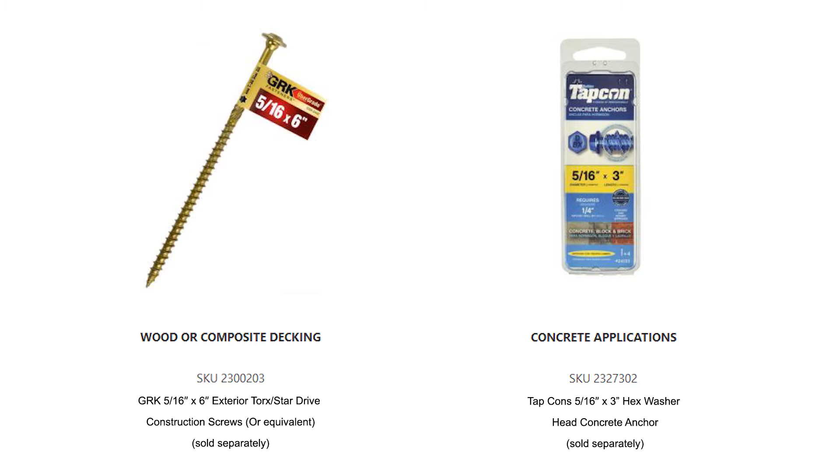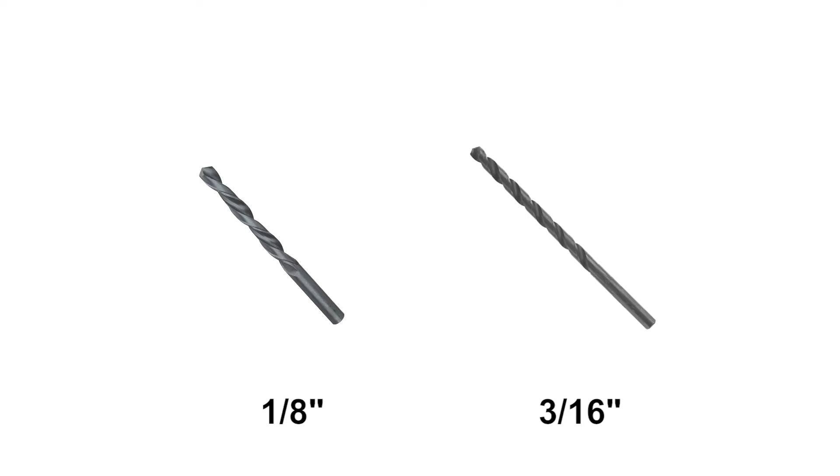Prior to starting the installation of any aluminum railing project, ensure you have the proper tools and safety protection. We recommend the following tools: safety glasses, tape measure, pencil, level, miter saw with non-ferrous blade, cordless drill, 4 clamps, carpenter square, appropriate fasteners for mounting posts to deck surface, lower rail clip jig, cutoff tool, 6-inch number 2 square drive bit, 1/8 inch and 3/16 inch drill bits, 3/16 inch hex wrench included with cable kits, cable gripping tool (optional), cable cutting tool (optional), cable release tool (optional), threading tool (optional), 90-degree threading tool (optional).

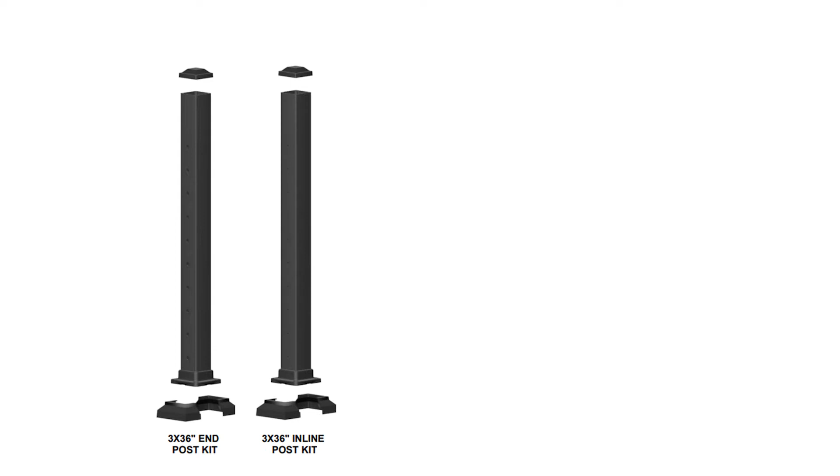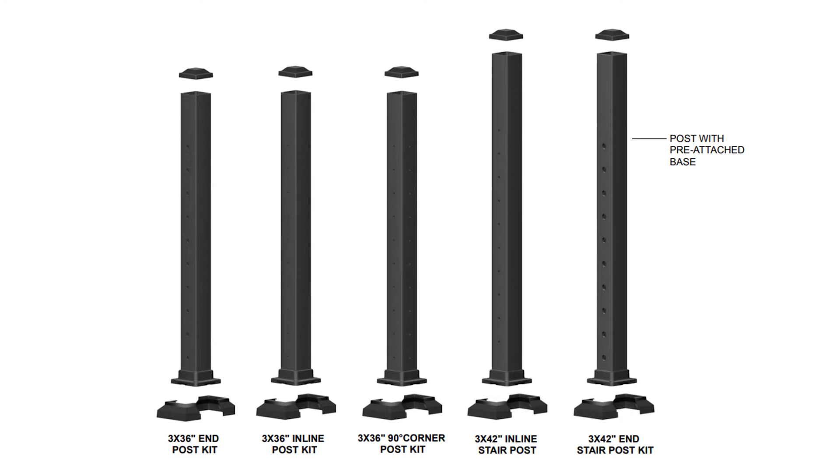Kits and parts for assembly: 3x36 inch end post, 3x36 inch inline post, 3x36 inch corner post, 3x42 inch inline stair post, 3x42 inch end stair post. Each post kit includes an aluminum post tube with attached base plate, post cap, and 2-piece base plate cover and an install guide.

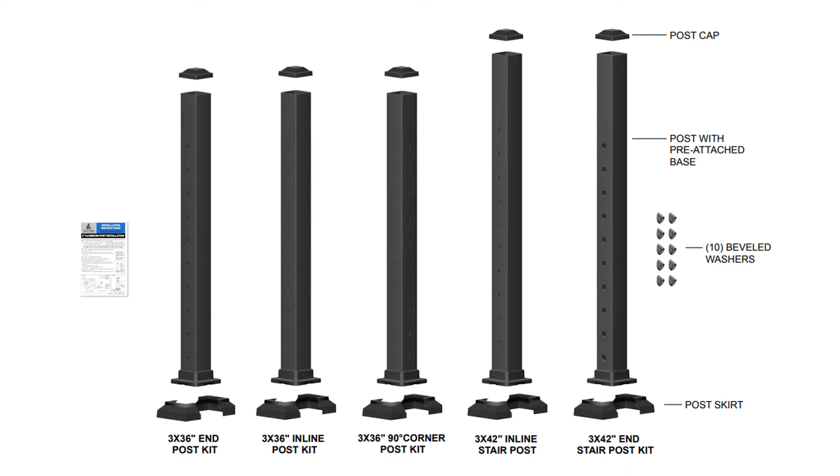3x42 inch end stair post kit includes 10 beveled washers. Post to deck mount screws; anchors are sold separately.

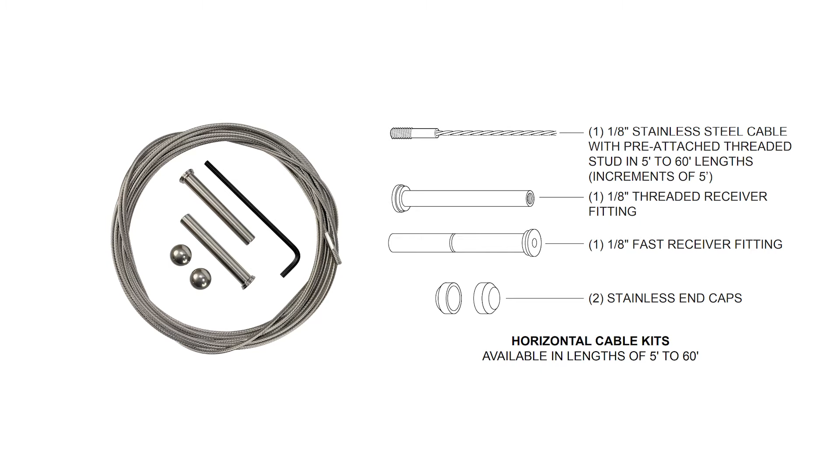Horizontal cable kits available in lengths of 5 feet to 60 feet. 1 1/8 inch stainless steel cable with pre-attached threaded stud in 5 feet to 60 feet lengths, in increments of 5 feet. 1 1/8 inch threaded receiver fitting. 1 1/8 inch fast receiver fitting. 2 stainless end caps. Horizontal cable deck stair full frame kit.

1 top rail snap, 1 top H-channel, 2 straight plastic plugs, 2 angled plastic plugs, 1 intermediate cable support, 1 bottom H-channel, 1 bottom rail snap, 4 deck attach clips, 4 stair attach clips, 20 number 8x3/4 inch self-tapping screws, 1 support leg with screw.

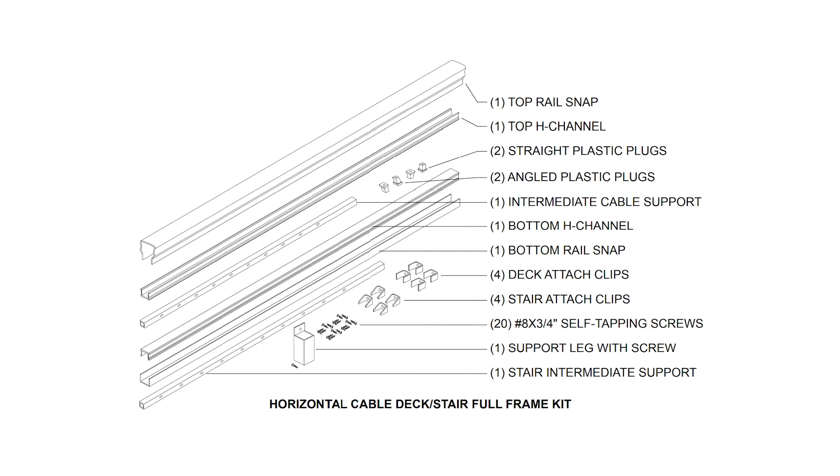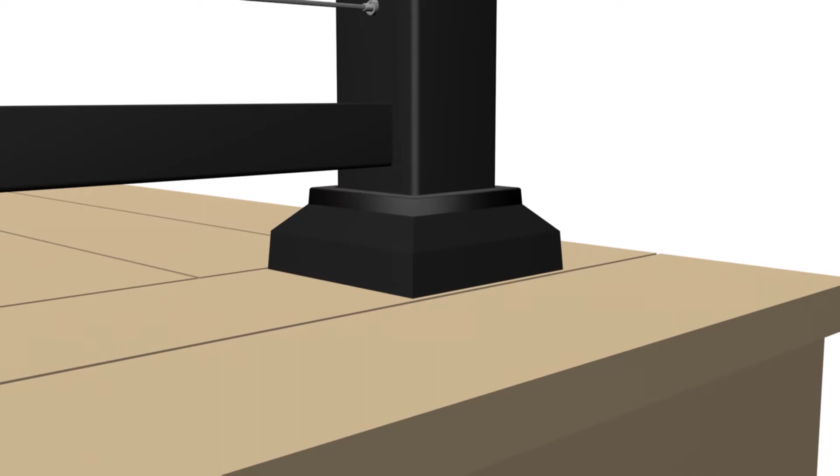1 stair intermediate support. Important notes: do not install base plate covers until railing assembly is completed. Actual cable panel lengths are 69.43 inches and 91.31 inches. 3-inch posts are required to reach 6-foot and 8-foot lengths.

Caution: if installing lighting, wiring must be installed prior to securing posts to deck surface and installing top rail snaps.

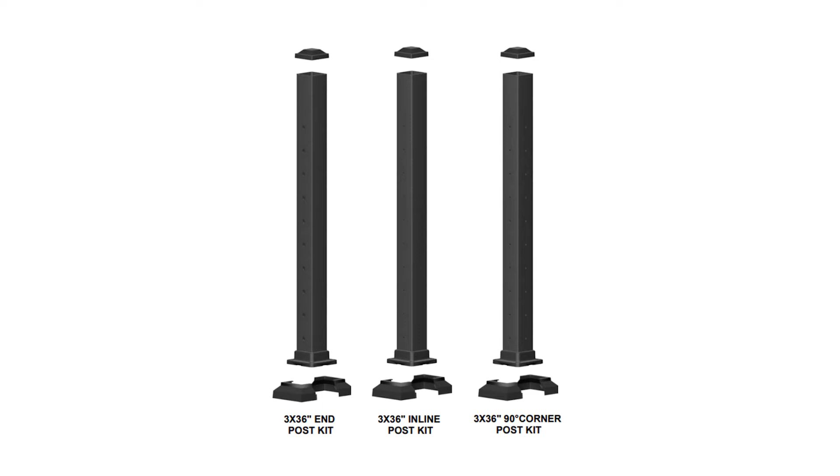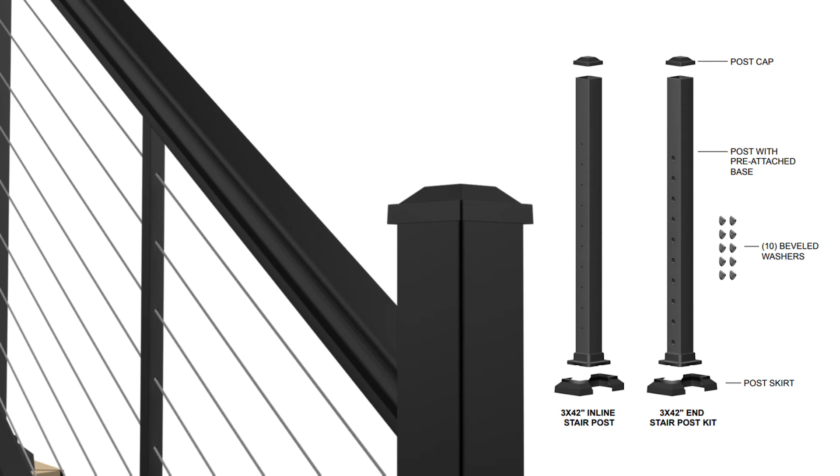Let's get started. First, we'll plan out and install the 3-inch aluminum posts. Determine necessary posts required: end, inline, or corner. Note: for structural integrity and proper installation, it is critical to use the correct railing posts in all locations. Corner posts are required for all 90-degree corners, and inline posts are required for all 45-degree corners. 42-inch stair posts are required for stair applications.

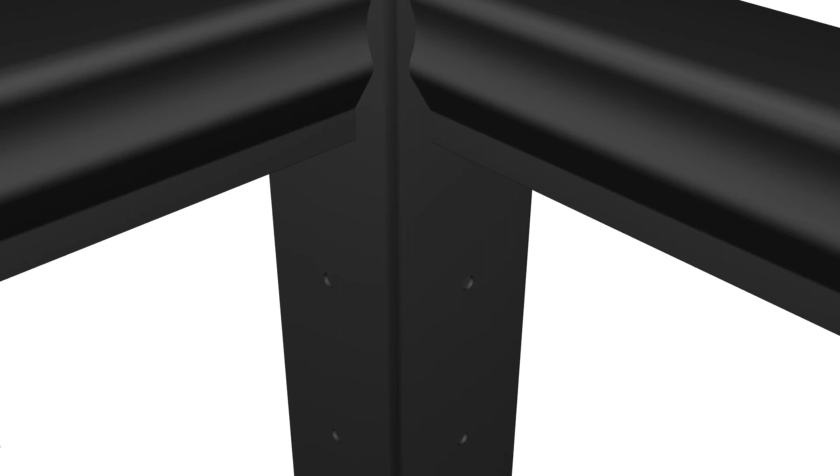Plan ahead for cables up to 60 feet in length and install end posts at the appropriate locations. Important: for 90-degree corner post applications, prior to installing rail attachment clips, ensure plastic plugs are installed in the 2 pre-drilled hole locations. Leave plastic plugs in place until threading cable through corner posts.

Measure from the top of the base plate upper shoulder. Place a horizontal pencil mark at 33 3/8 inches for 36-inch rail height. Next, measure the center of the 3-inch posts and place a vertical mark at center of post.

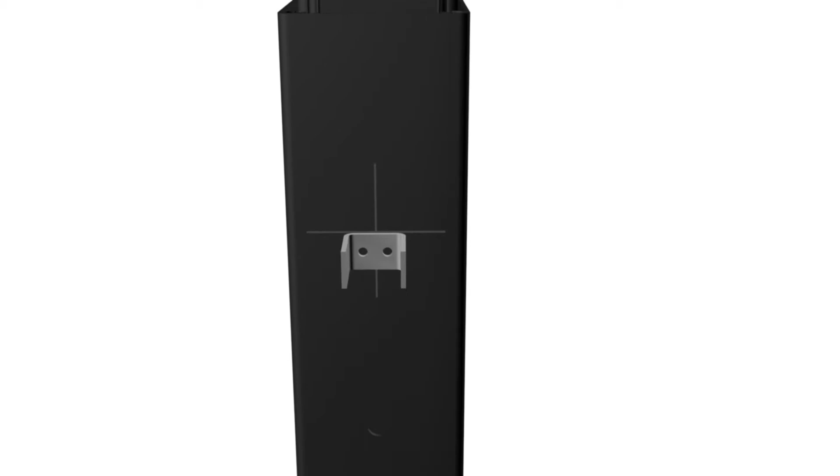Install 1 upper attach clip per opening. Center 1 upper clip on the pencil line. Secure attach clip with 2 number 8x3/4 inch self-tapping screws. Important: only install 1 upper clip per opening.

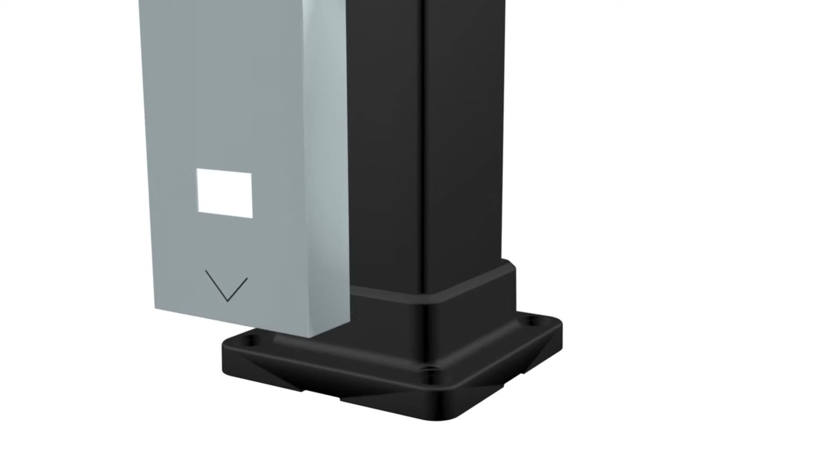Using the lower clip jig included with the post kits, install lower clip on post and secure with two number 8 by 3/4 inch self-tapping screws. Clips and screws are located in the panel kit. Top rail kits without bottom rail: if no bottom rail is installed, do not install lower rail clips. Bottom rail snap, lower rail clips, and support legs are not included in top rail kits.

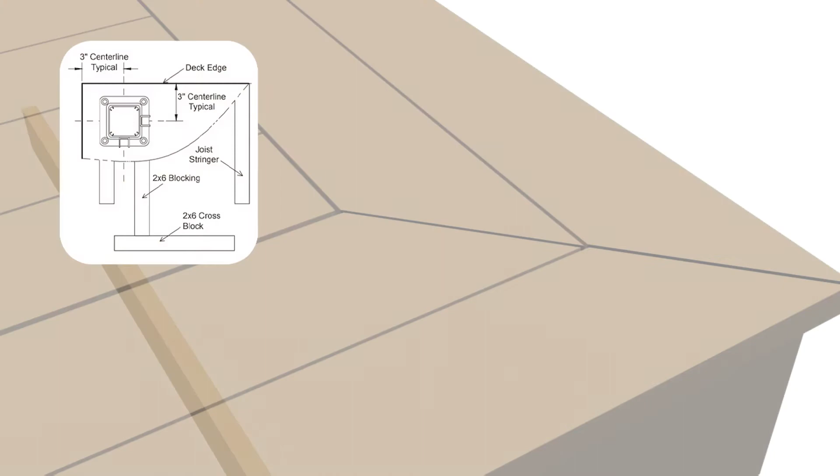Important: for safety and to comply with building codes, a 10th cable must be installed with a 36-inch rail height. Install proper post blocking. Use proper attachment screws or anchors as directed. Deck screws at each post location are not included with post kits.

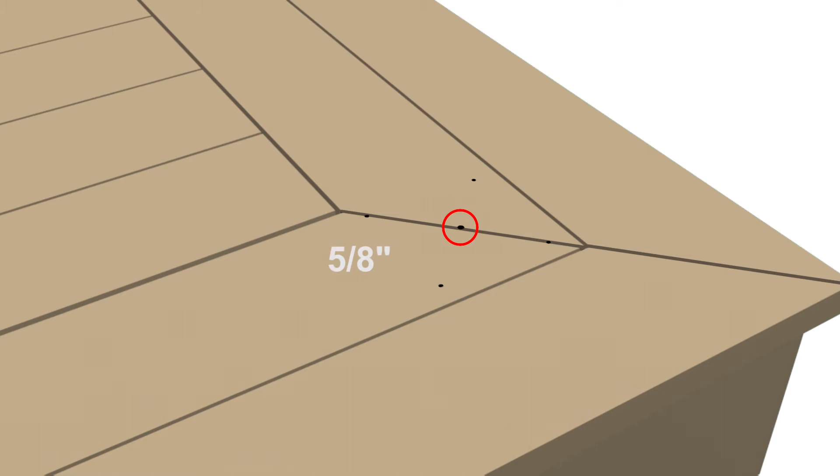With a 3/16 inch drill bit, pre-drill through deck boards and into blocking. Drill a 5/8 inch hole in the center of 4 deck screw holes for lighting wires (optional). Level and plumb post using shims. Secure posts to deck with suggested screws.

Now we'll go over the deck installation with the bottom rail. This system uses the deck stair full frame kits. Measure openings between posts and cut 2 U-channels per opening.

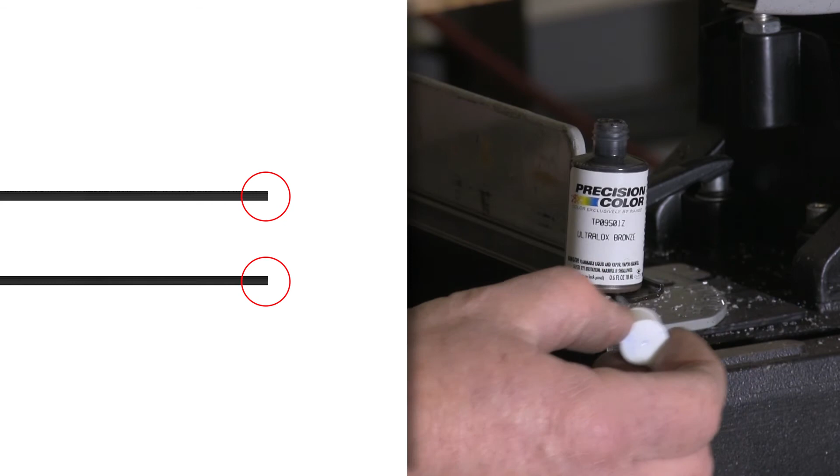Cut 1/16 inch less than opening size. Clean cut areas and apply touch-up paint on exposed ends. Measure each U-channel and mark the center of U-channels. Drill a 1/8 inch hole in the center of each U-channel.

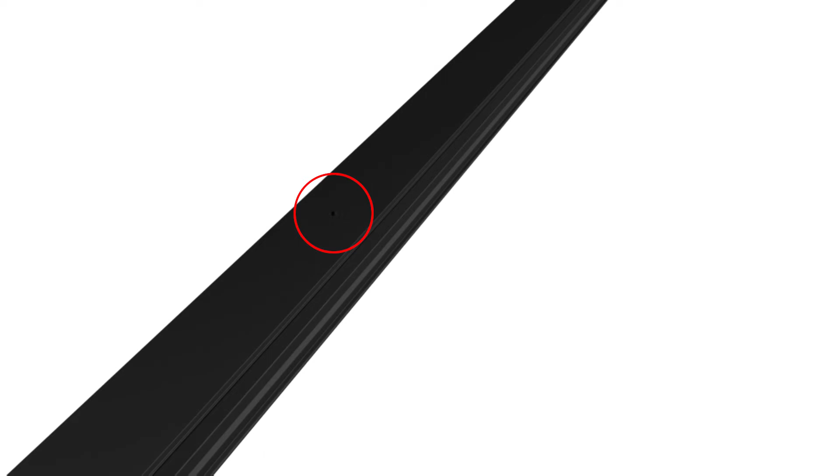For 36-inch height railing, cut support to 29 3/4 inches. Important: only cut from the bottom end of the support, which can be identified by a longer section without a cable hole. Verify alignment of cable holes with posts before cutting.

Attach a 3/4 inch by 3/4 inch plastic plug into the flat side of each U-channel with a 3/4 inch stainless screw. Insert the 3/4 inch by 3/4 inch intermediate cable support onto the plastic plug attached to the lower U-channel. Then attach the upper U-channel by inserting the attached plastic plug. Again, verify alignment of cable holes with posts.

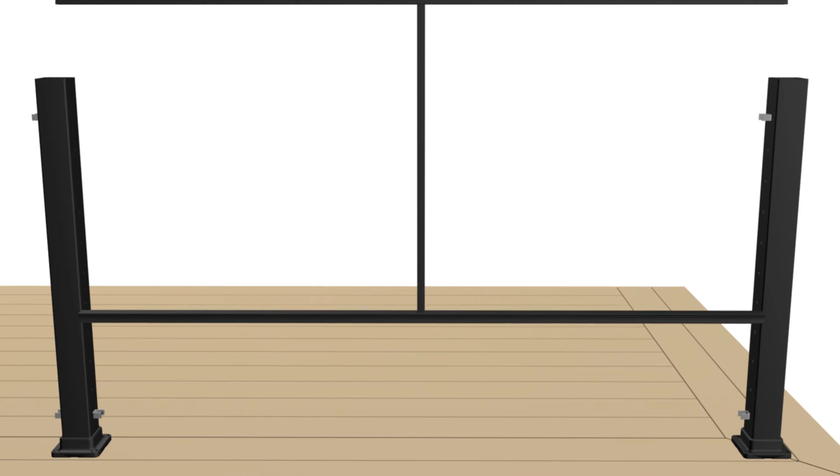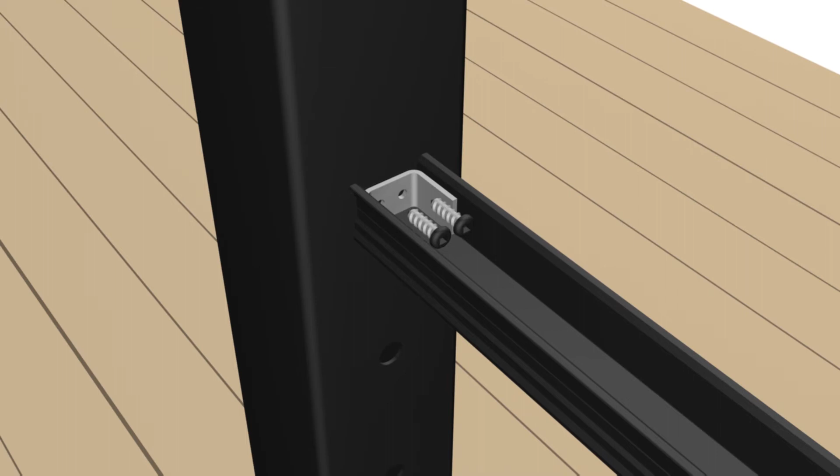Place the railing frame onto the lower rail clips and slide one end of the U-channel onto the pre-installed upper channel clip. Secure one end of the U-channel to the pre-installed upper channel clip with 2 number 8 by 3/4 inch self-tapping screws. At the opposite end of the U-channel, insert the rail clip into the U-channel. Align the top edge of the rail clip against the prescribed pencil line. Attach the rail clip using 4 number 8 by 3/4 inch self-tapping screws.

Clamp or hold the top snap against the posts and mark for cutting.

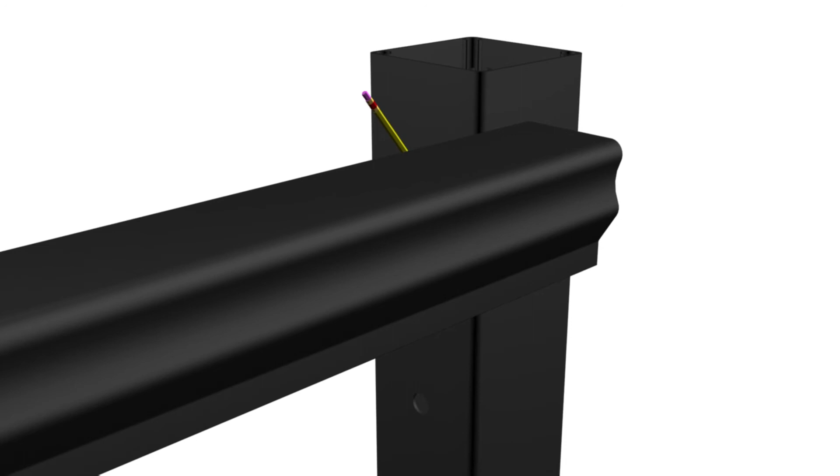Cut top and bottom snap covers 1/16 inch less than opening. Clean the cut areas and apply touch-up paint on all exposed metal.

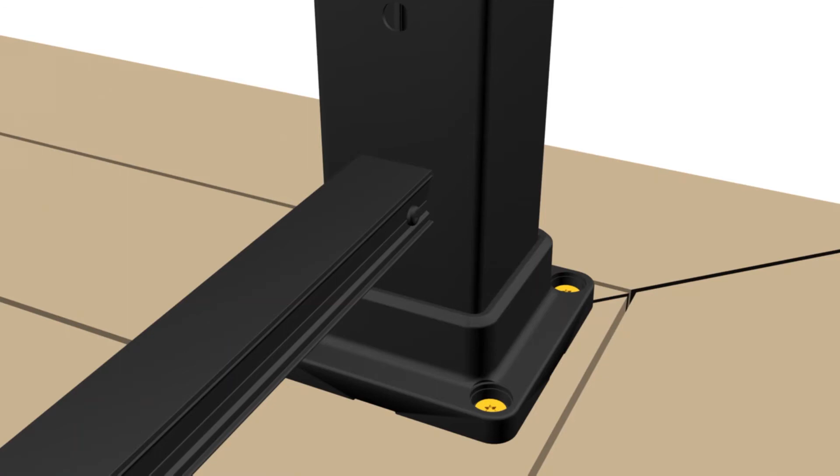Install bottom rail snap first by pressing over the lower U-channel until properly seated. Install support leg by sliding it under the bottom rail at the center of the rail opening. Using one painted number 8 by 3/4 inch self-tapping screw, secure the support leg to the bottom rail snap.

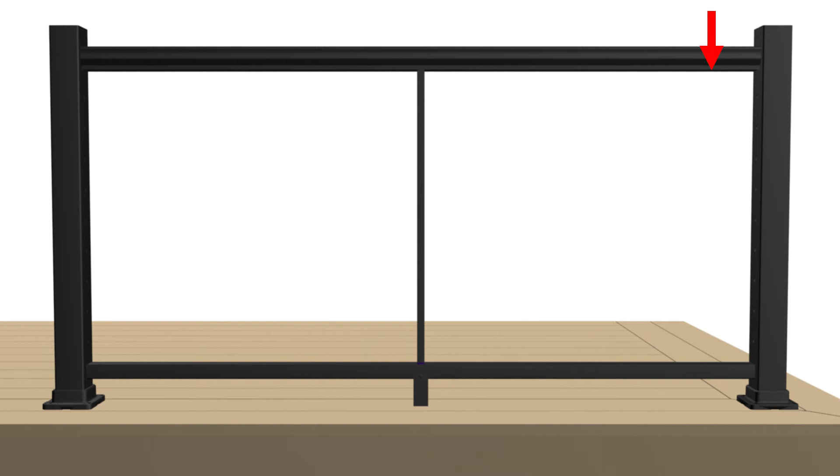Install top rail snap by pushing down on the snap until fully seated on the upper U-channel. Helpful hint: apply downward pressure on the top rail starting at one post and working towards the other post. Do not use a hammer to secure the top rail.

Install plastic plugs only in the bottom cable holes of end posts which are not used with a bottom rail application.

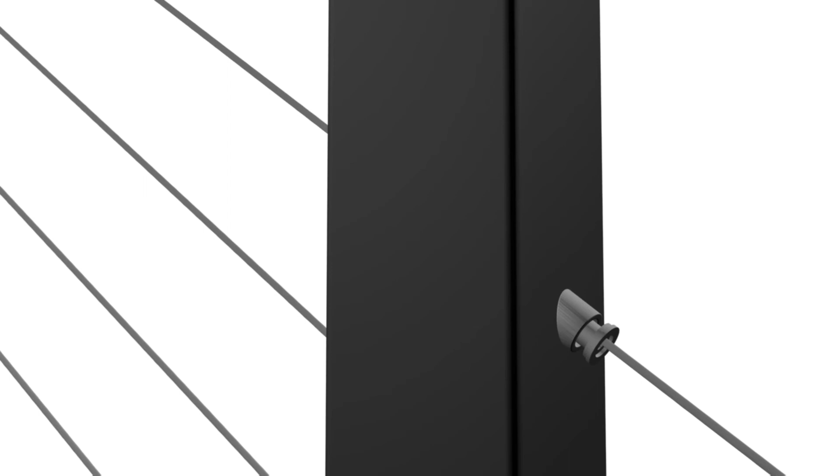Next, we'll install the horizontal stainless steel cables. Insert the threaded receiver fittings into the post. Note: if the end post was installed too close to a house wall, it may be necessary to loosen the post anchor bolts. Plan so that the threaded receiver fittings are at the starting point and the fast-fitting receivers are at the bottom of the stair run or the final post on the deck.

Cable runs cannot be longer than 60 feet. If the railing is longer than 60 feet, an end post will need to be used to finish and start a new cable run. Thread the male swaged cable stud, attached to the cable, into the threaded receiver fitting, and turn 3 to 4 complete turns.

Thread about 1/2 of the stud into the threaded receiver fitting. Feed the bare end of the cable through all your intermediate cable supports and through the end post where you will be installing the fast receiver fitting.

Corner post inserts allow for easy feeding of cable through 90-degree posts. Cable threading tools, straight and corner versions, are recommended for easy feeding of cables. When using the threading tools, push the cable through posts rather than pulling them. This prevents separation of the cable and tool.

Note: alignment plugs are installed in 90-degree posts to keep insert holes aligned. Do not remove plugs until cables are installed into empty holes.

Rotate the fast receiver fitting clockwise as you push it onto the cable. If the cable begins to unravel, you are rotating the fitting in the wrong direction.

Important: for bottom of stair runs, beveled washers must be installed to align fast receiver fittings with pre-drilled holes in the post. Note: it is normal to have trouble inserting the cable into some fittings.

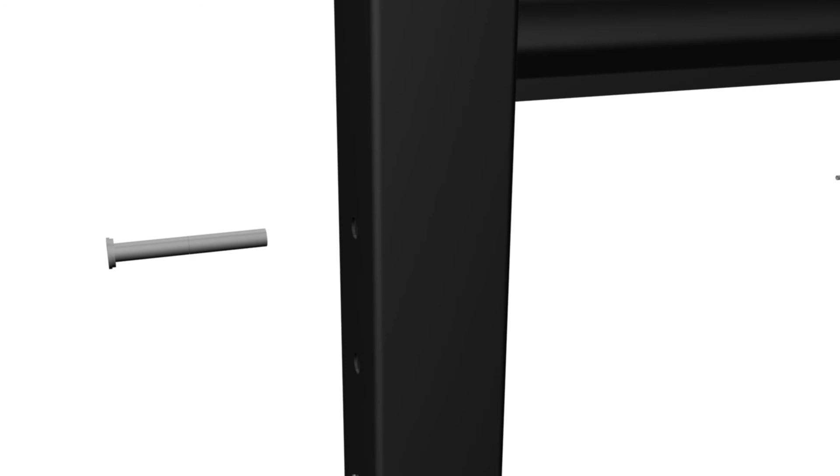This occurs if the locking mechanism is already locked. To free it up, insert a cable release tool or other tool with 1/8 inch or smaller diameter. Larger tools may get locked in the fitting and become very difficult to remove.

Push the fast receiver fitting along the cable and firmly into the hole in your post. While holding the receiver against the end post, pull the bare end of the cable to remove as much slack in the cable as possible.

Important: inspect to ensure there is no slack against the whole length of the wire, especially around corners.

If you need to remove a cable from the fast receiver fitting, slide a cable release tool onto the cable, then push firmly into the fitting. This will release the mechanism to pull the cable back out.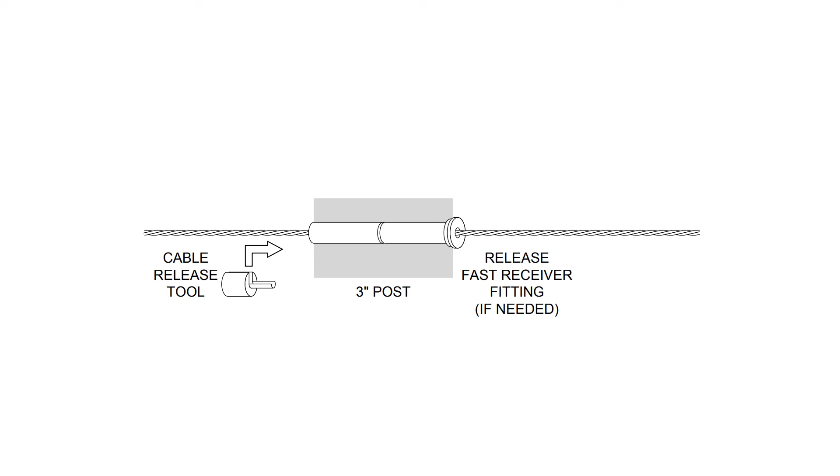Cut the cable flush with the hole in the back of the fast receiver fitting using a cutoff wheel.

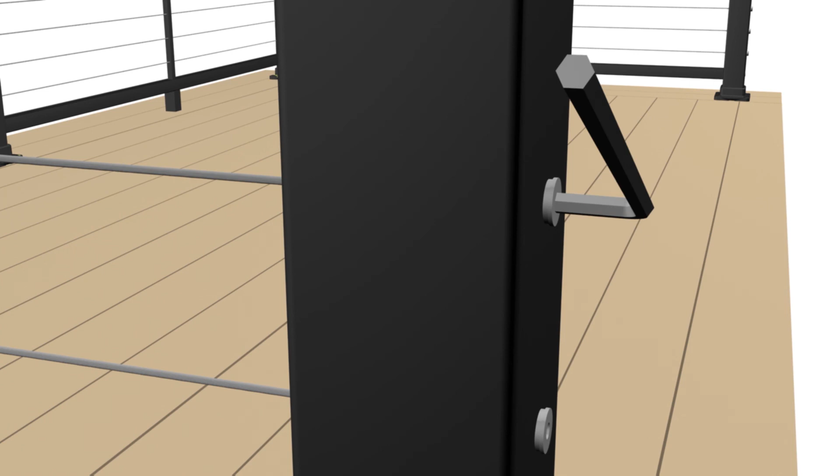Go to the other end and tension the cable by holding the cable securely to prevent it from turning while you turn the threaded receiver fitting with a hex wrench. A cable gripping tool is recommended. Be careful to protect the cable from damage while tensioning.

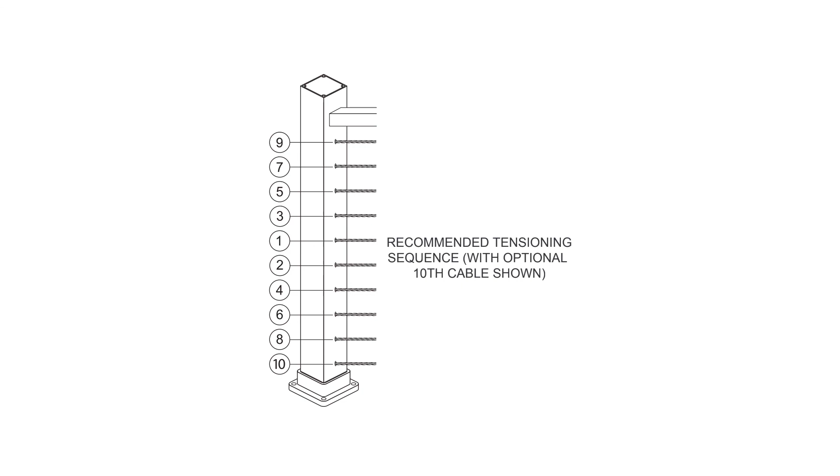The male swaged cable stud will be pulled into the threaded receiver fitting by rotating the threaded receiver fitting clockwise. Tension all cables in sequence, beginning with the center cables, moving up and down toward the top and bottom. As you tension each cable, give it a sharp pull downward mid-span to help set the wedges, the gripping mechanisms in the fast receiver fittings. Then retension as necessary in the same sequence.

Be aware that the cable may move as much as 3/16 inch toward the tensioning terminal as the wedges seat. Press stainless steel caps onto all fast receiver fittings and threaded receiver fittings. Helpful hint: spray window cleaner onto stainless steel caps to ease installation.

Install post caps and post base plate vinyl covers after railing assembly is completed.